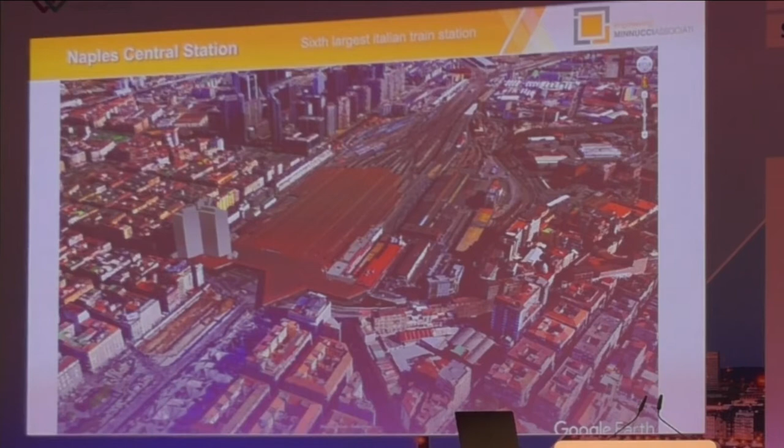So let's go back to the project of Naples Central Station. What you are looking at is just a video that shows you what we have done. So this is the model of Naples Central Station inserted in Google Earth, and as you can see, this is just a dynamic rendering that is extracted directly from the IFC federated models.

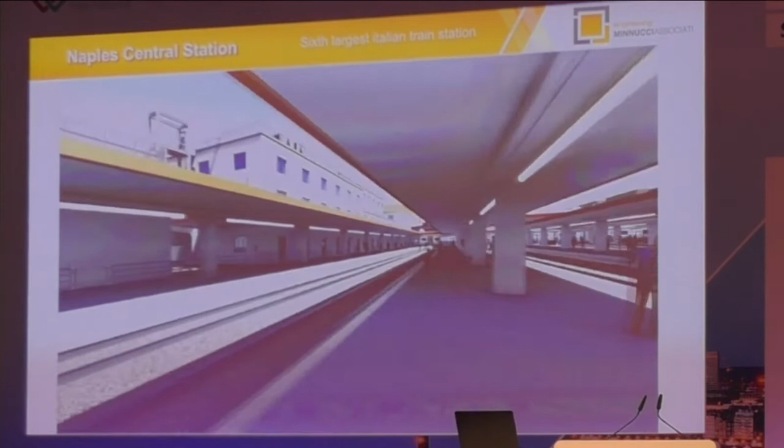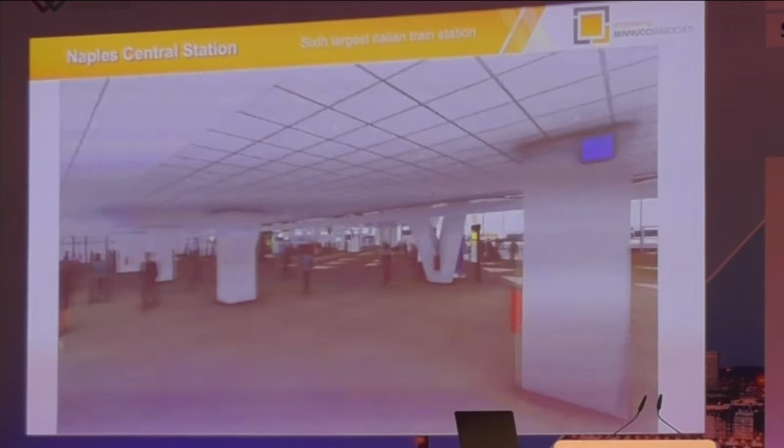So the scope of this video is just to show you how big the project was. The project is composed of 5 buildings and also the infrastructures that reach the buildings. The station is one of the largest stations that we have in Italy, and is the main station in the south of Italy. More than 150,000 people flow through the station daily, and more than 480 trains transit through the station.

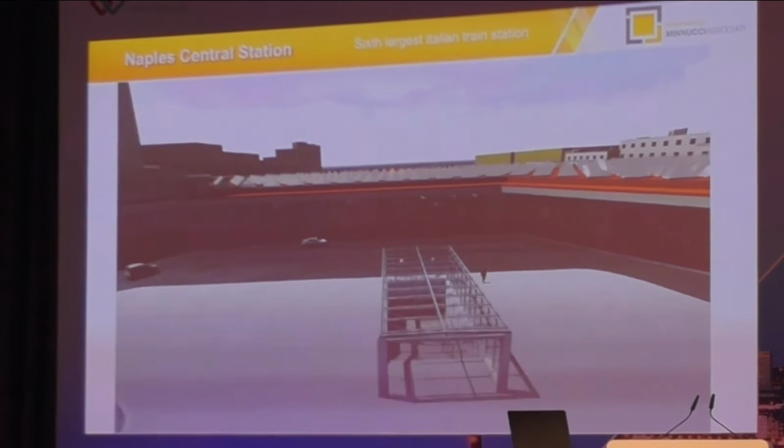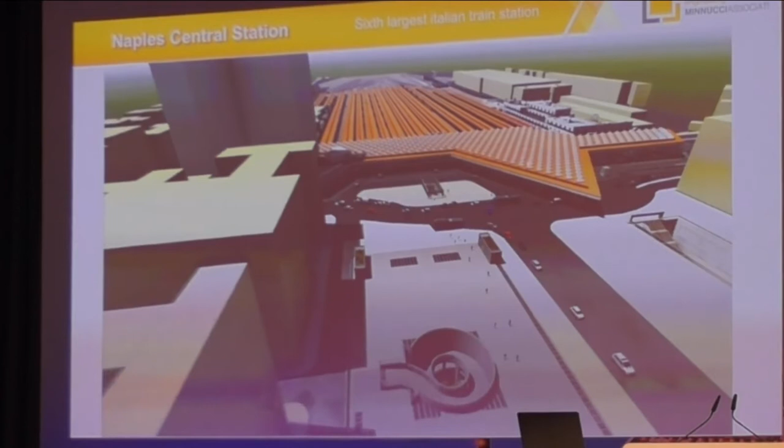So the scope of the project was to apply to the rest of the main Italian train stations the goals that we had. The main goals, the primary goals, were the method for the generation and maintaining up to date the asset information model, not just of this station, like I told you before, but also of the rest of the Italian stations.

You have to consider that RFI has more than 2,600 stations in Italy. And so to better understand the critical issues and solutions for dealing with the CDE and management with it, and then apply it to the facility property, the security and safety, and manage this kind of stuff directly from the CDE.

Then, of course, there are other primary goals and some more secondary goals. One of them was, for example, to better understand how to update the survey, and so how to update the model and how to align the management system and the model.

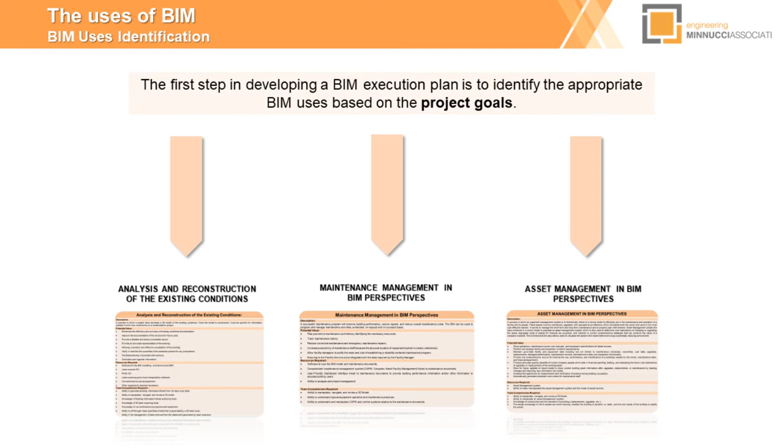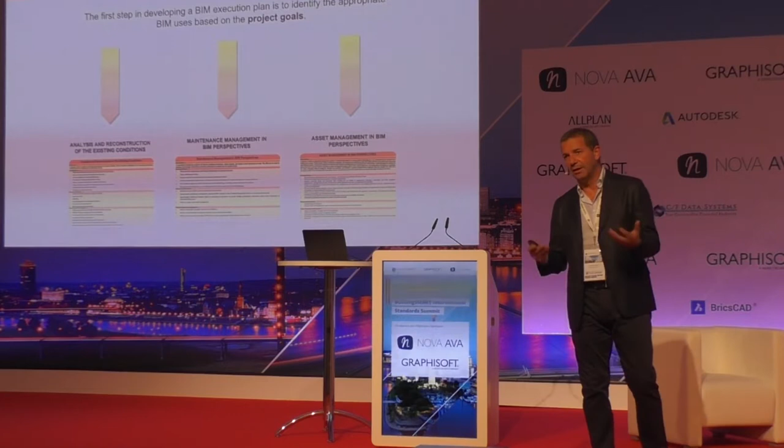So the first thing that we did was to identify the BIM uses. We had the analysis and reconstruction of the existing condition and rebuilding the existing condition virtually. And then we also had to deal with the management system, and also to manage the assets, like I told you before.

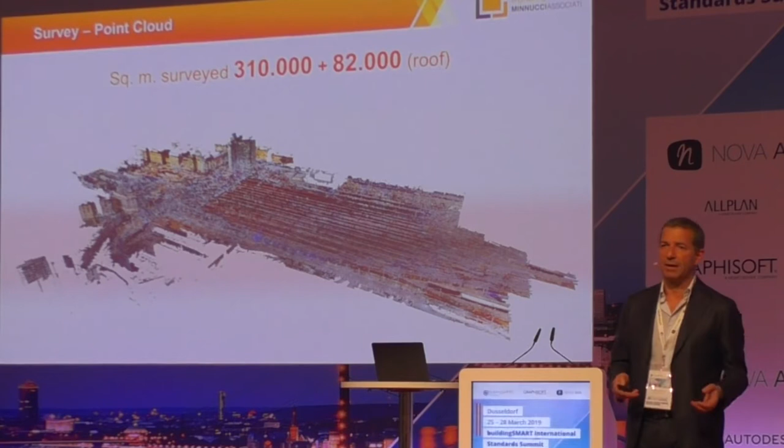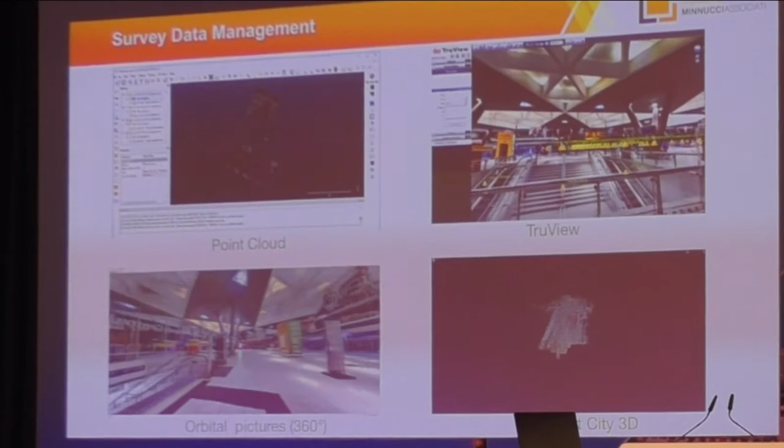So just to better understand, what you are looking at is the main point cloud of the station that we have surveyed. As you can see, the total of the model is really large, something like 40 hectares. So as you can imagine, we had a lot of issues, a lot of trouble and effort during the process. The survey data, we did it by drone and by laser scan.

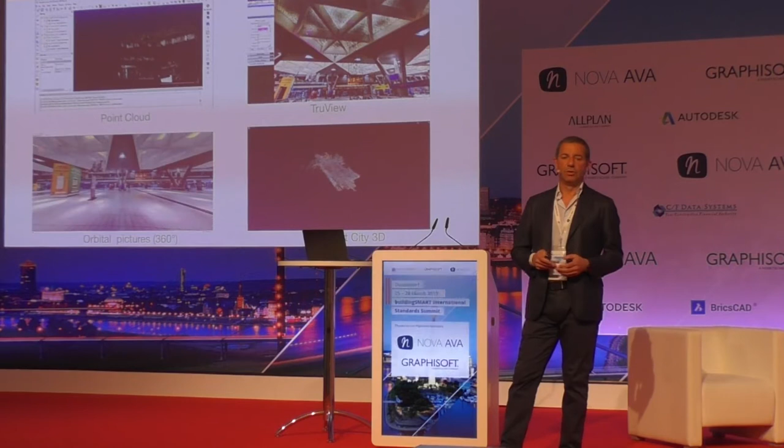We could define a point cloud, and then with the orbital pictures, we were able to have the real situation as it is. So we used software like TruView of Leica, or another Italian software that is Smart City 3D, to work with the point cloud.

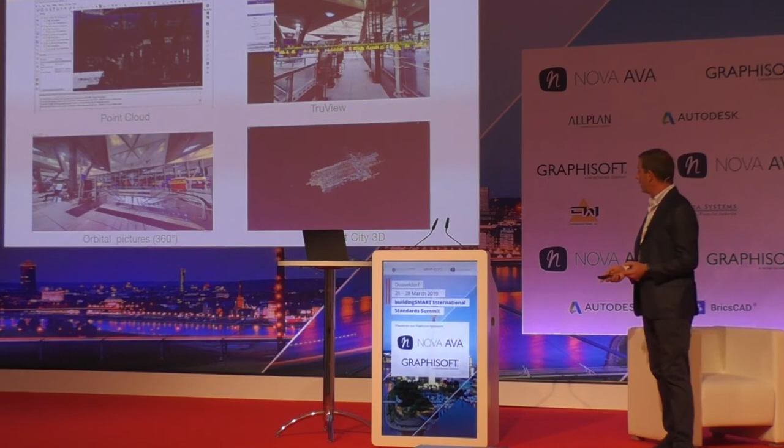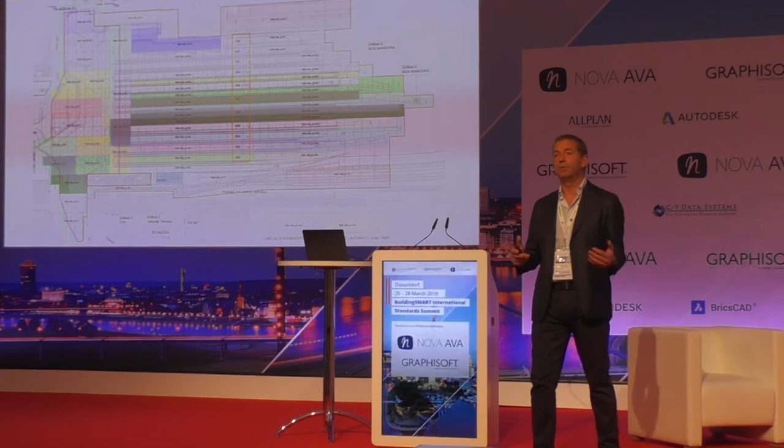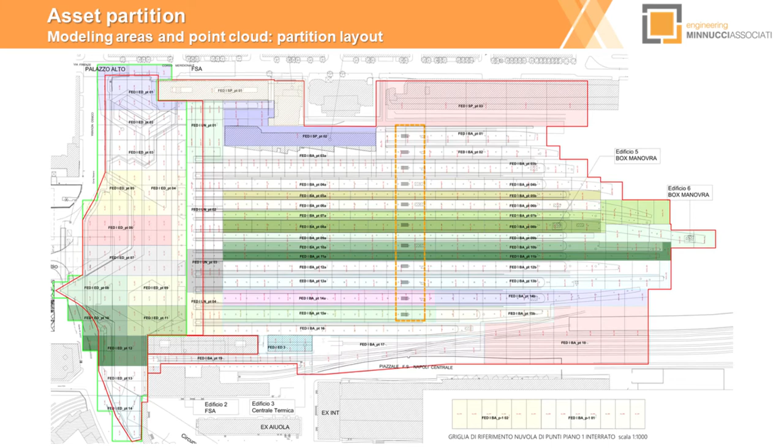Okay, then we had to model the station, but before that we had to deal with the point cloud. Dealing with the point cloud is really complicated when the point cloud is so big, because there is a dispersion of the information. This dispersion of information is shown in this situation.

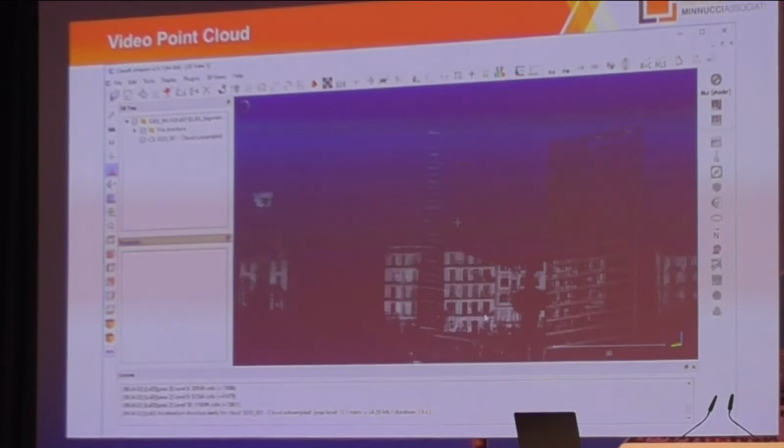So the point cloud is made from consecutive scans, and when you scan something, you have to think that in one scan you can also acquire points that are really far away from where you are. So you have to assemble everything together. The result is an enormous point cloud that is really difficult to deal with.

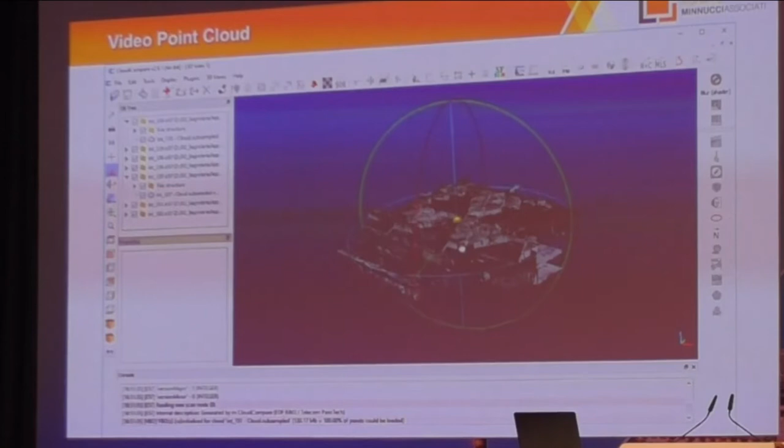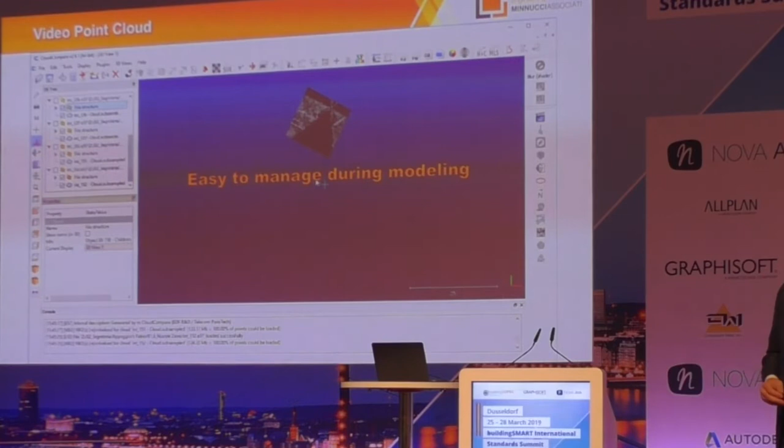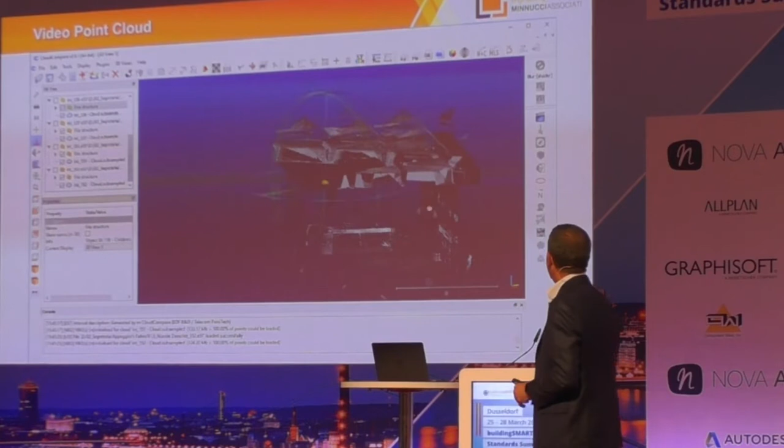So we decided with the client to partition the point cloud with criteria that we defined with them. And so we cut these portions. In the future, we can substitute one portion when something important is changed. Also, these portions are easy to manage during the modeling phase. So I'll go ahead.

The next step was the classification analysis. We studied the asset encoding mode that the client has. The client has really great experience in the field that started 200 years ago. So we had a lot of work to do with them, and then we identified the main IFC classes, and then we defined the hierarchy of the systems.

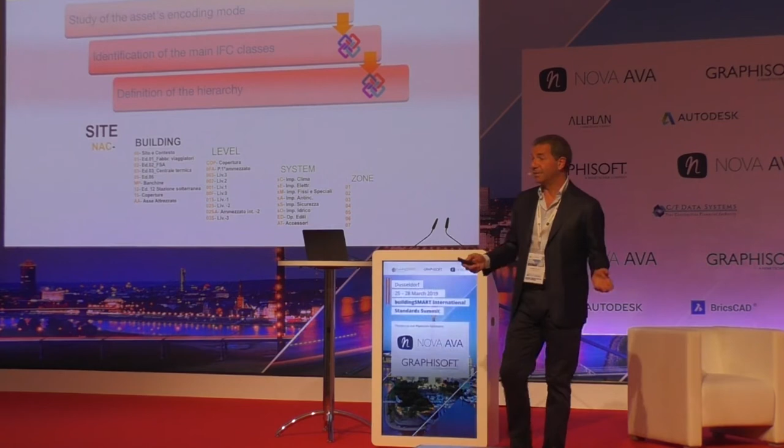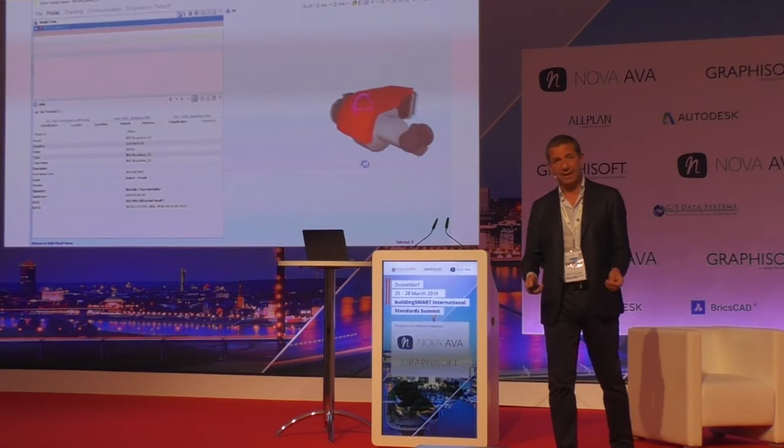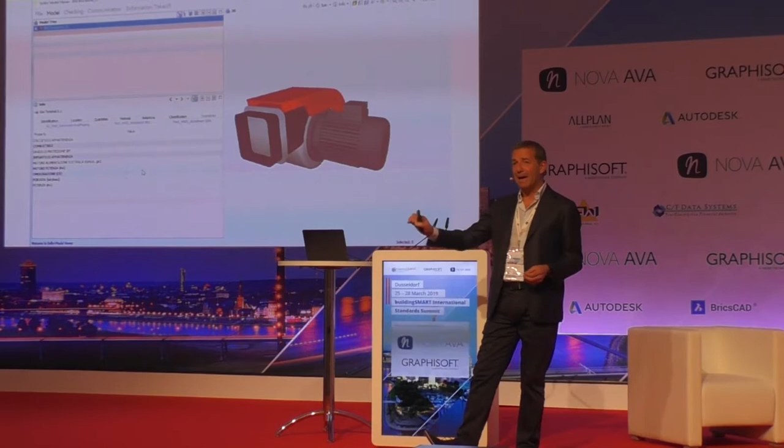The next step was to define the reference data library. Every equipment, every element, we modeled. In the model, we inserted the information, we classified the information in the types of elements, in an IFC way. So every element has its own p-sets of attributes that are necessary for the maintenance during the life cycle of the elements.

These elements are then inserted in the specific position where they are, and I'll show you later how many there were and are. Then we acquired the documentation from the client. As you can imagine, the documentation was largely disorganized because the station has been working for many years.

So we took the data sheets, the survey data that we did, and then the architectural and also the equipment and the MEP as-built layouts. We arranged them in an organized classification, so we could later insert them inside the CDE.

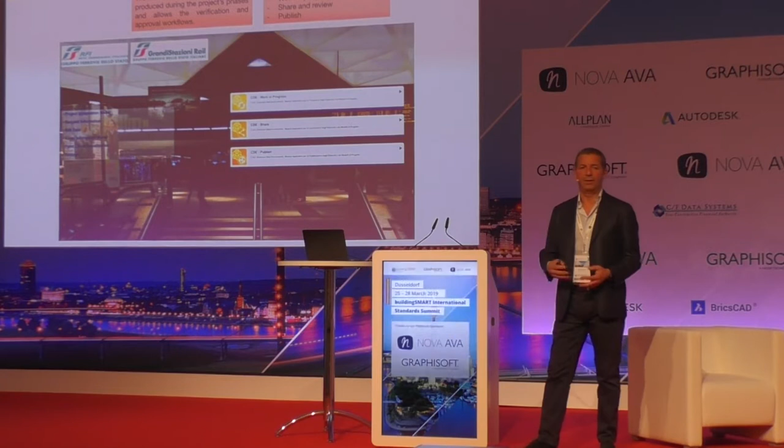So as you know, the typical CDE has a work in progress where the designers, the modelers, shared through a BIM cloud authoring program, more than one, the federated models and the documents, and then we started to work with the client together. They asked us to modify something, and so in the shared area we shared the documentation and the models, and at the end, after the approval phase, we published the model.

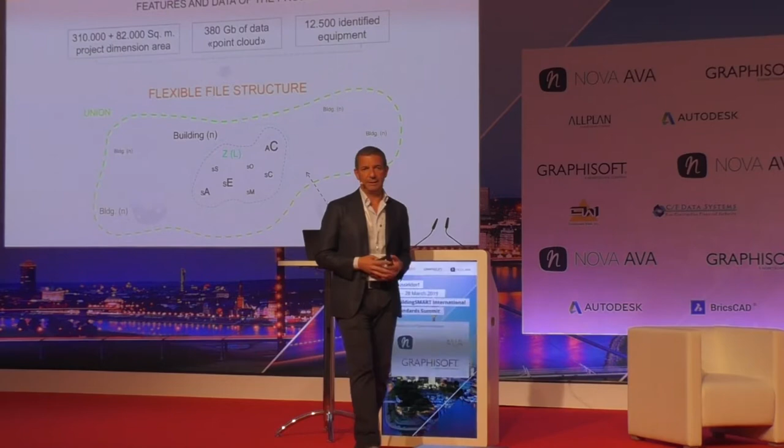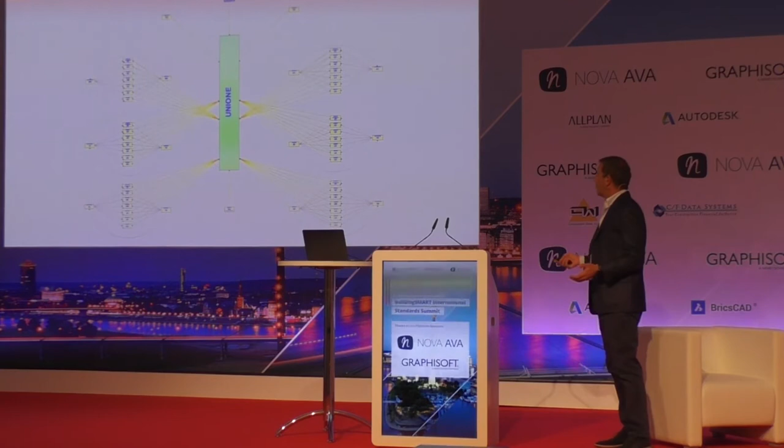So at the end, we had really big federated models, and also the point cloud, and also all the equipment that has to be maintained. There are more than 12,500 that we have identified and inserted in the model. So we did a flexible file structure. The result of this flexible file structure is a lot of federated models for discipline, for areas, for maintenance systems, and the union of them is the model that you have seen at the beginning.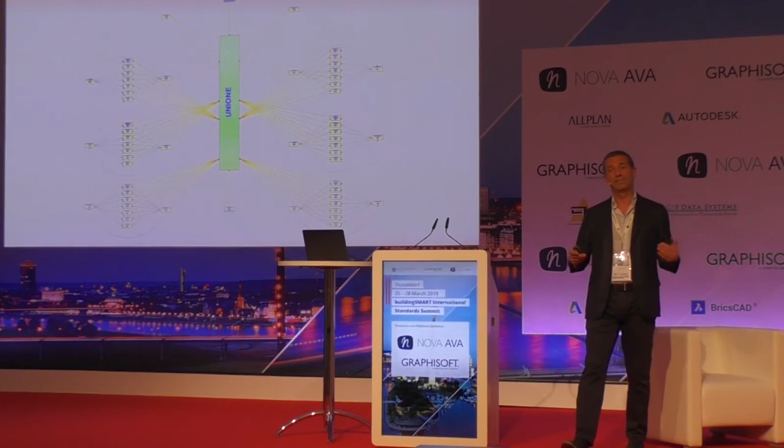The result was 44 structural models for the implementation of the BIM uses that we defined. And, okay, there is something that is jumped, but we did everything with Open BIM. I don't know why Open isn't shown there. But we did it with Open BIM.

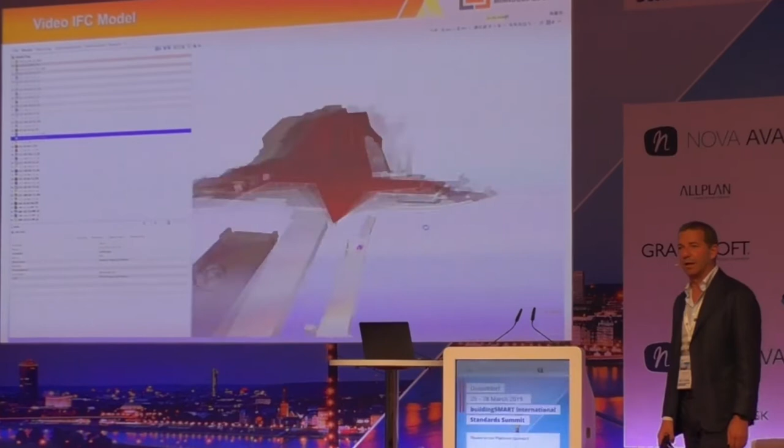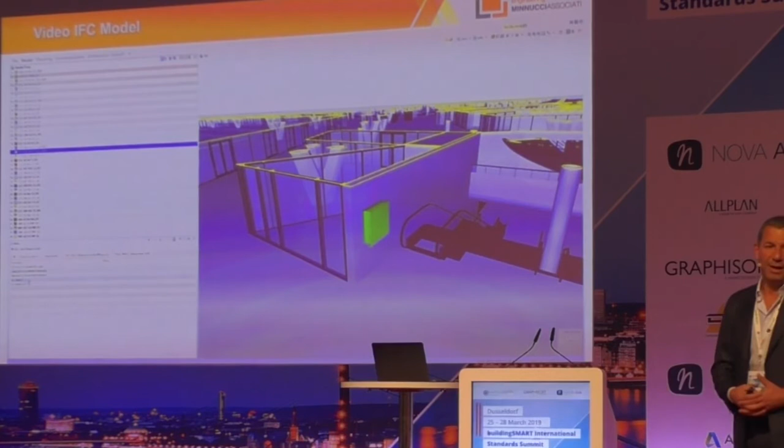This is the result. What you are looking at is the model inside Solibri. So this is the federated model of all the models, as you can see, in IFC. You can do whatever you want. You can query the model. You can look at something. You can look at every equipment that has to be maintained, and also at other properties of the model.

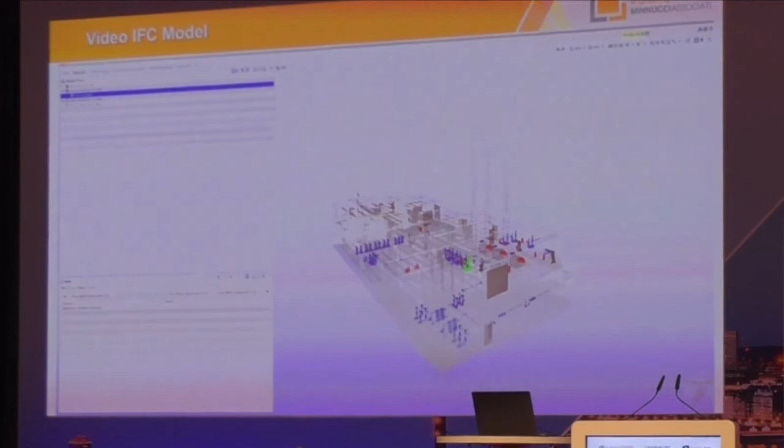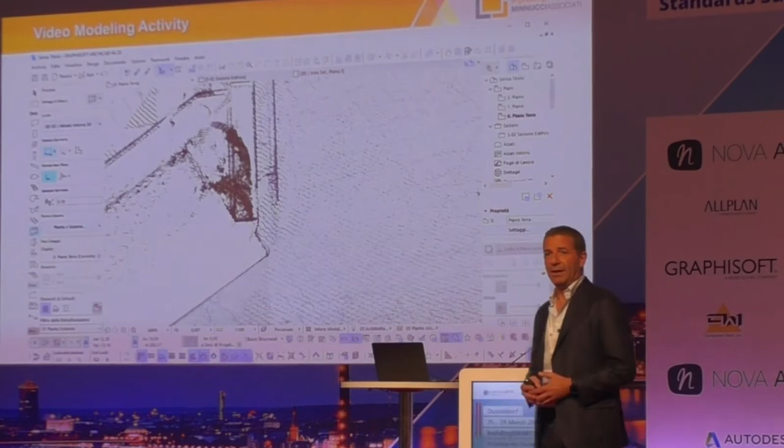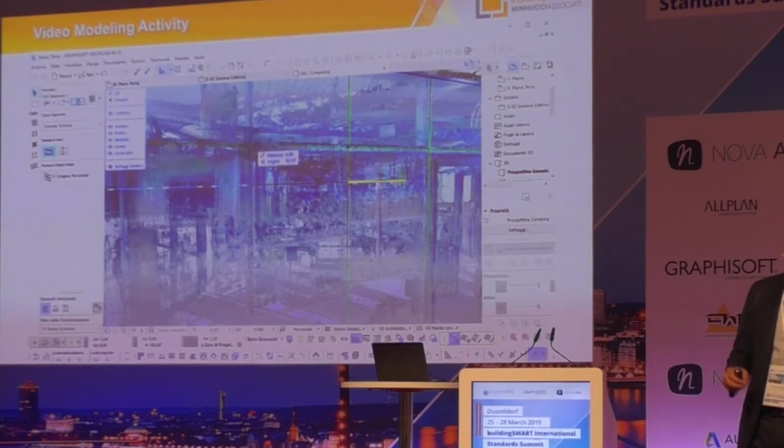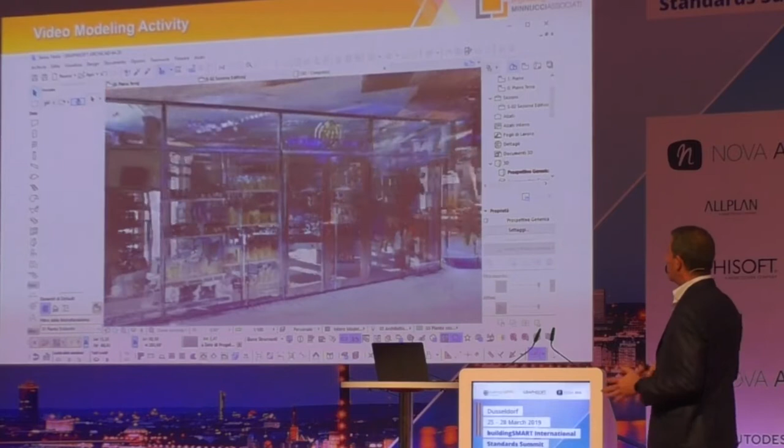Okay. Just to make you understand how hard the activity of modeling is. This is a portion of point cloud that a modeler is using to model a curtain wall, for example. In this case, as you can see, the modeler is able to insert the curtain wall in the right position, and every frame of the curtain wall can be put in the right position and is overlaid to the point cloud, so we can be sure about what we are modeling. So the as-is of what we surveyed and what we model is absolutely certain.

So the equipment. Then we inserted all the equipment, like I told you, the equipment that has to be maintained. And this is just a view of an example of them. Okay.

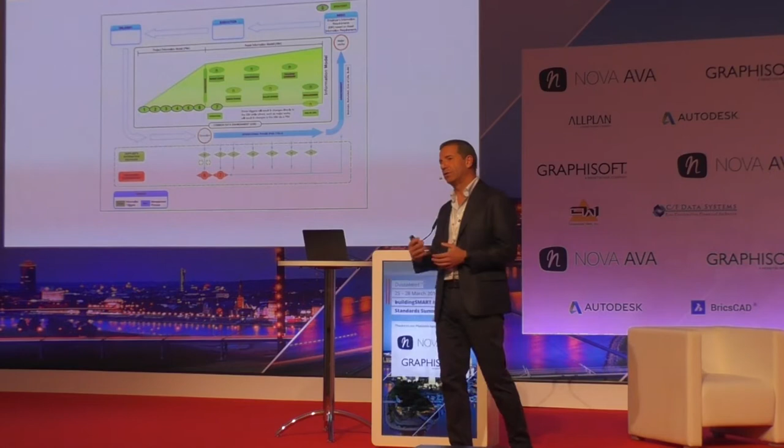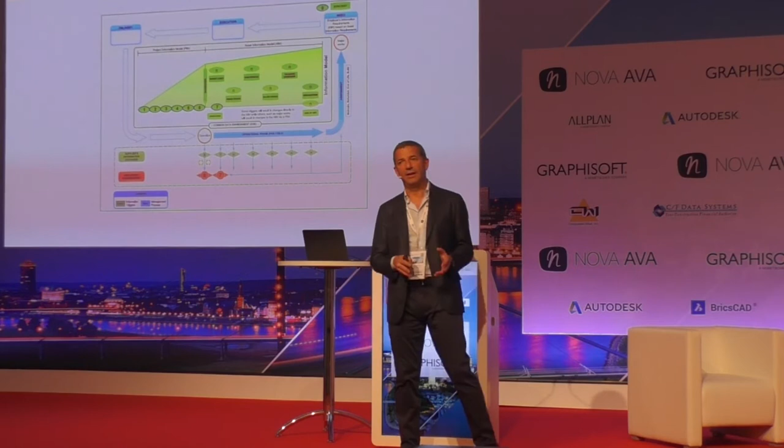Everything has to be aligned. For accounting, normally in a larger situation, everybody uses the SAP system. So it's really important in this phase to define which system is the master of a piece of information, and which one is just the slave, which system is writing the information, and which one is reading the information, because the information has to be unique. So we can have, in this situation, major works, maintenance or minor works, or something else that will change the asset. So if something physically changes, the master has to be the model.

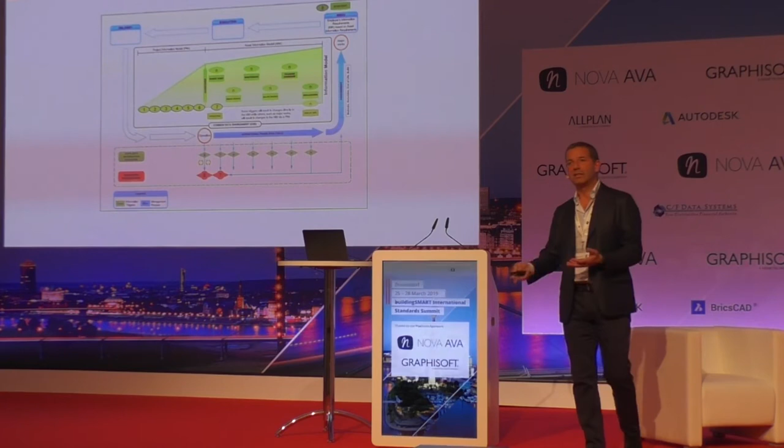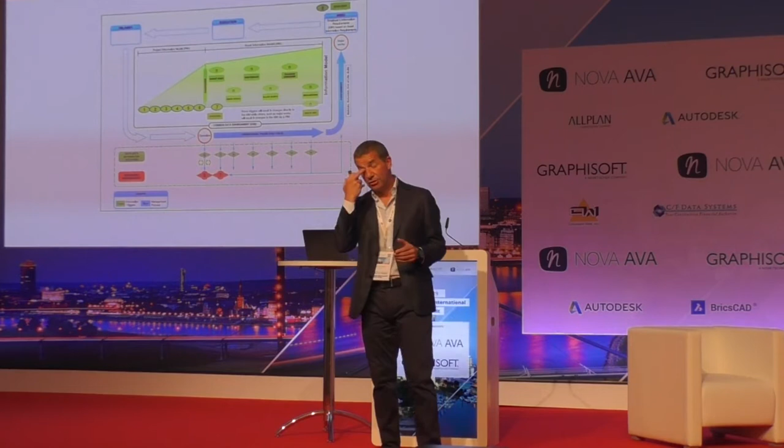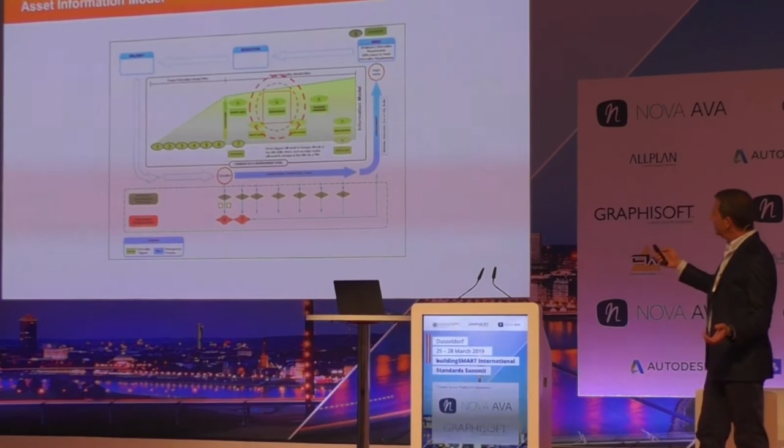When you modify something that needs a major work, you start a new project and you remodel everything, and then you have to substitute that portion of model that is changed, and also the portion of survey that is changed. But when you do maintenance, maybe something small is changed, and you have to update the model. That's the problem. So we are in this situation, and we can have many maintenance processes during the life cycle of the asset that can change the asset.

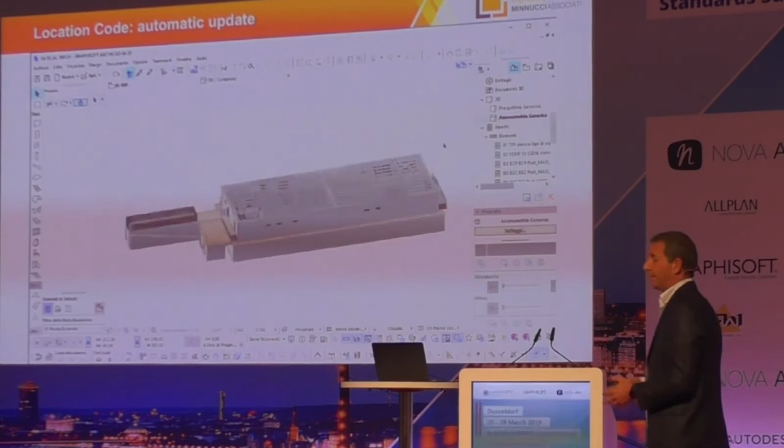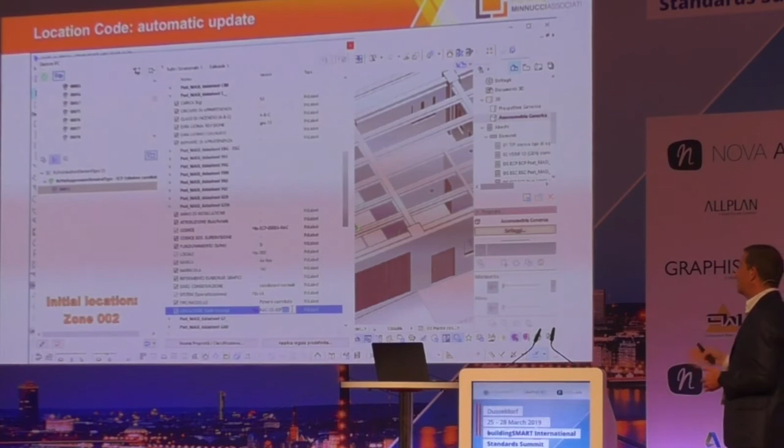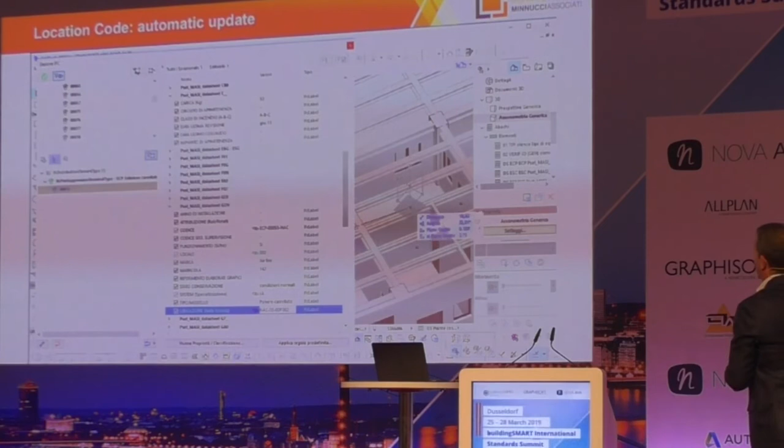What we did was this. For example, we set the authoring program in a certain way that we are able to extract directly, automatically, some information from the model, like the location code that is the position of the element in a specific way. As you can see, we are in the 3D of the authoring program, and this element, an extinguisher, that could be inside a specific area, can be moved to another area. So it has to change its own location code.

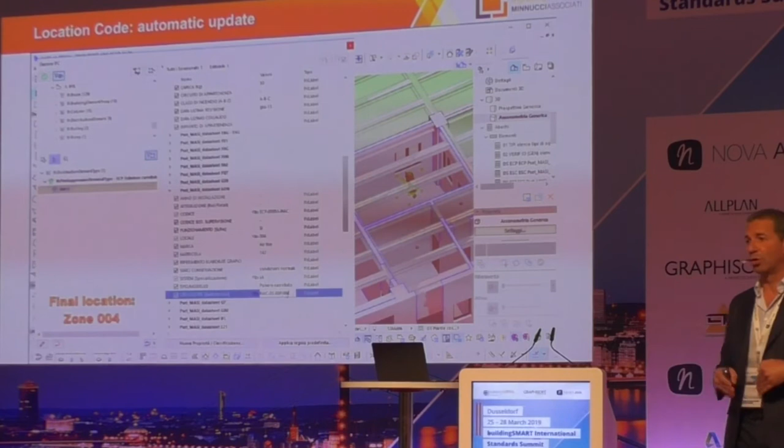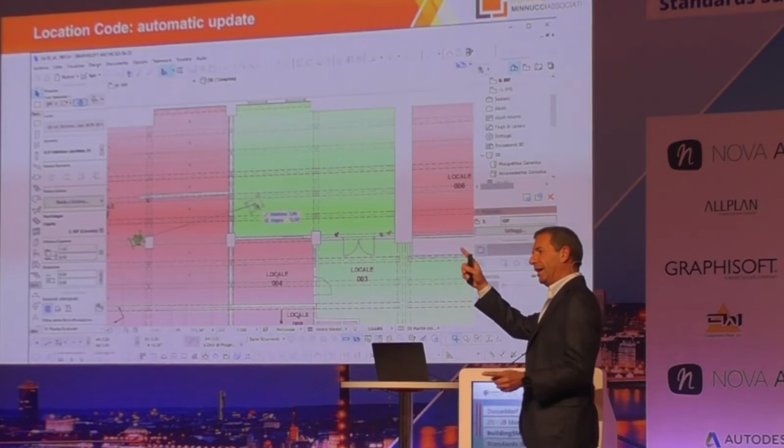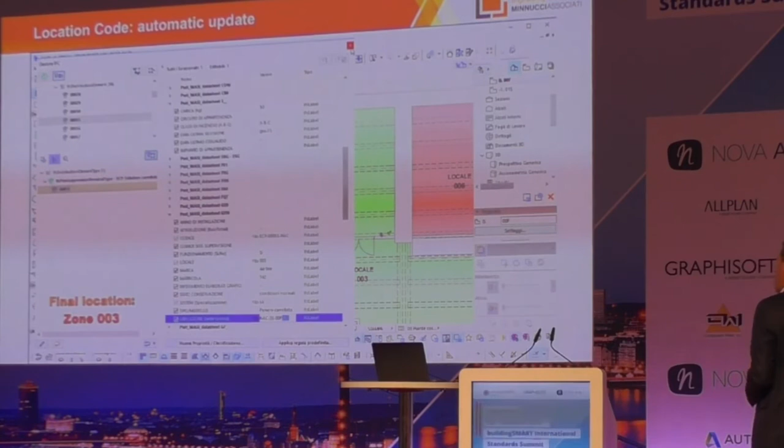So as you can see, the authoring model, in 2D and in 3D, changes the location code automatically. So this means that if in SAP there is another position, they have to be reconciled. So this process is strongly important, because we can virtuously realign all the systems.

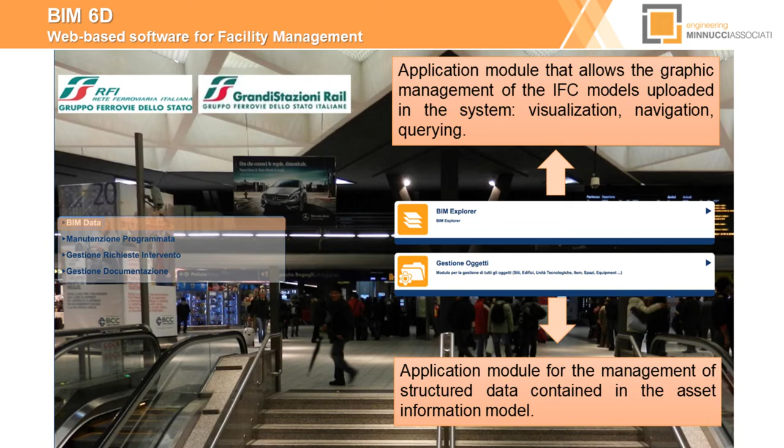So now we are in the 6D, in the facility management. We have to deal with our asset, and we have to maintain the system up to date, as I told you. But also we have to be able to query it, to visualize it, to apply a model management.

So as you can see, there is a part in this. We modified the CDE, so the CDE is able to show the element, but also to bear the maintenance. So in this case we have a process that is the programmed maintenance, the scheduled maintenance.

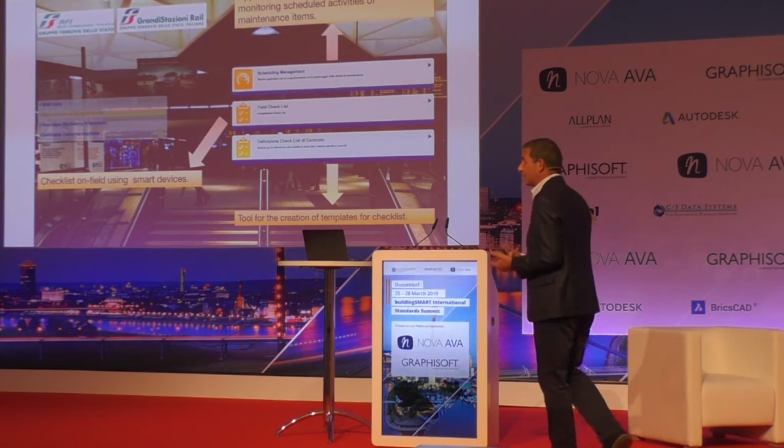So in the scheduled maintenance, you have a checklist that you have to fill on field, or the owner, the client, can create his own checklist and ask the facility service to fill it. Also, we have some job requests, and in this case we have to control the maintenance activities.

Also, we have to deal with the technical documentation of every equipment, which has to be kept up to date with the new situation. Okay.

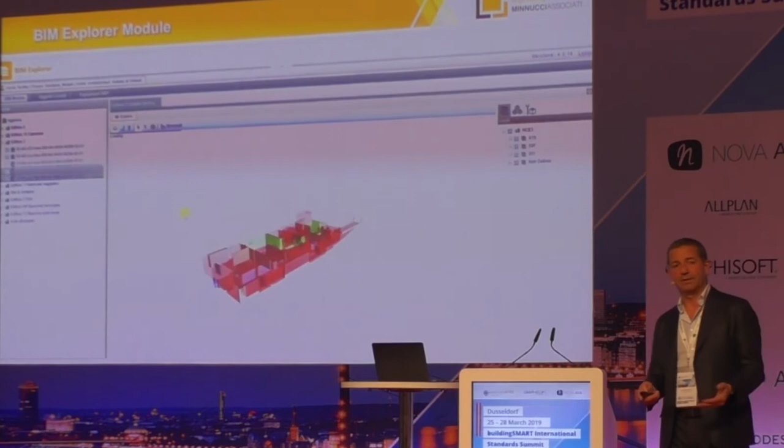So in this video, you can see the BIM Explorer, which is able, directly inside the CDE, to show the IFC property of one element, or also the SAP property of the element, because they are joined. And these are the SAP properties, and you can filter everything. So you can find an element, or an equipment, or whatever you want, by filtering the property in the inquiry. The SAP property or the IFC property of the element, or whatever you want.

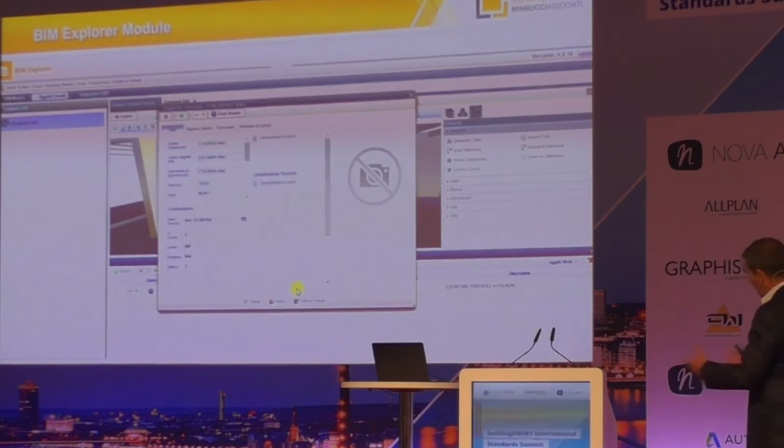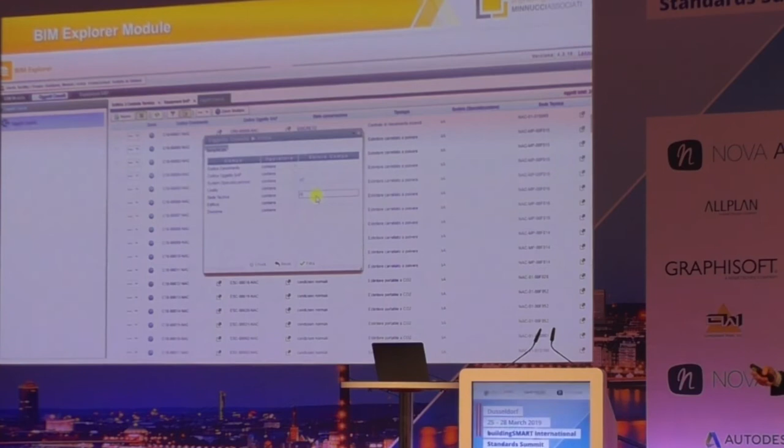Also the location code, or the area, or whatever you want. Okay, and of course you can also look at the scheduling jobs, export it in Excel, and filter in every way you need.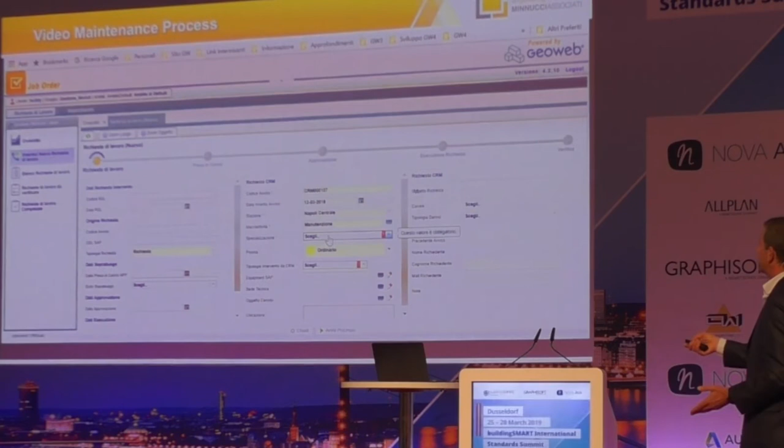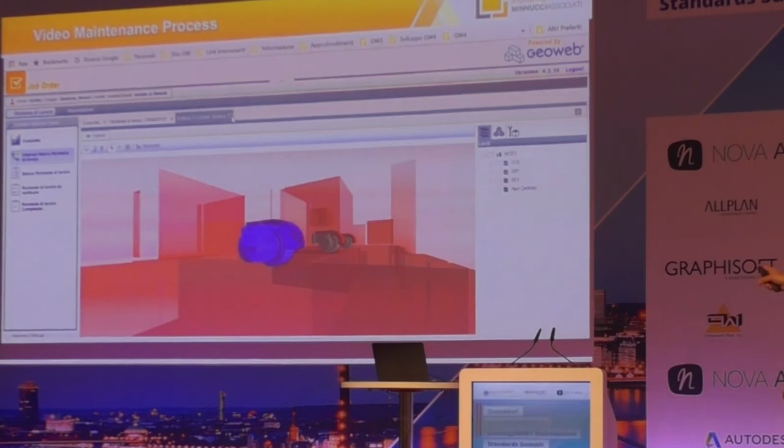Next step is the job request. The job request has a procedure that has to be followed. So at the beginning, there is the job request that you see there, and then you can insert the request of job. The request of job can be identified directly in the model, but can also be associated with the specific equipment that has to be maintained. So as you have seen before, you can look directly at the element with the unique code that it has.

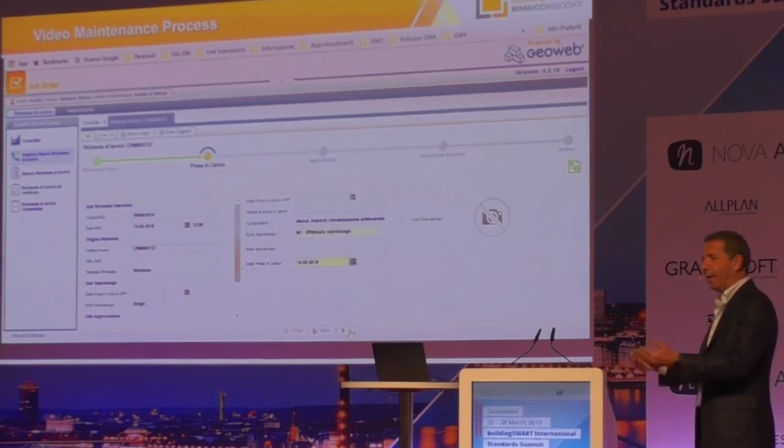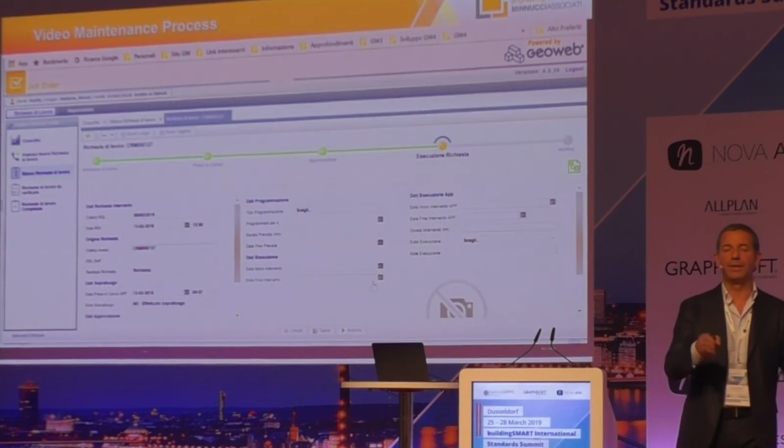And then there are many other steps that depend on the kind of maintenance. The maintenance could be done directly or could have an approval phase. If it has an approval phase, it has to be approved. And after it is approved, the maintenance service will program, schedule the activity. And when it schedules the activity, we follow another procedure to execute the activity.

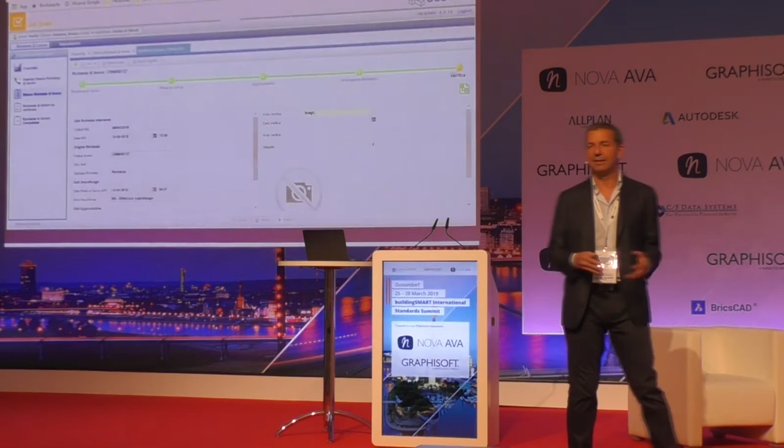So this is programmed, and on site, by using an app on a smartphone or a tablet, it can start the maintenance operation, and the controller can check that he or she is maintaining. He can scan the element directly on site. The controller can see that he or she is doing that work at that moment, and then at the same time or later can directly approve the intervention that was done, put the date of approval, and insert the documentation directly in the model.

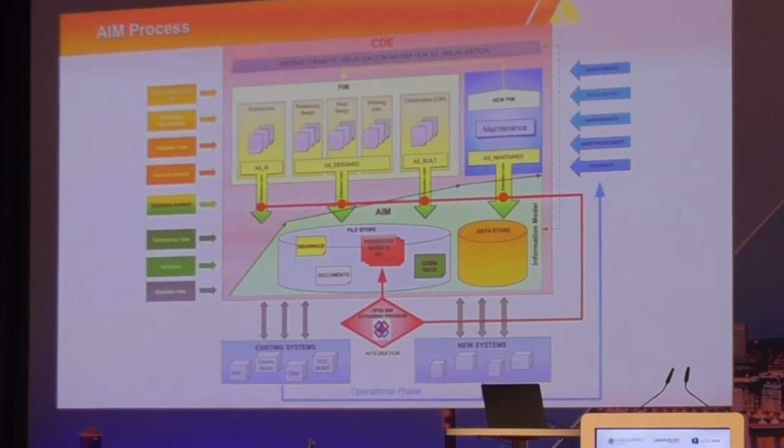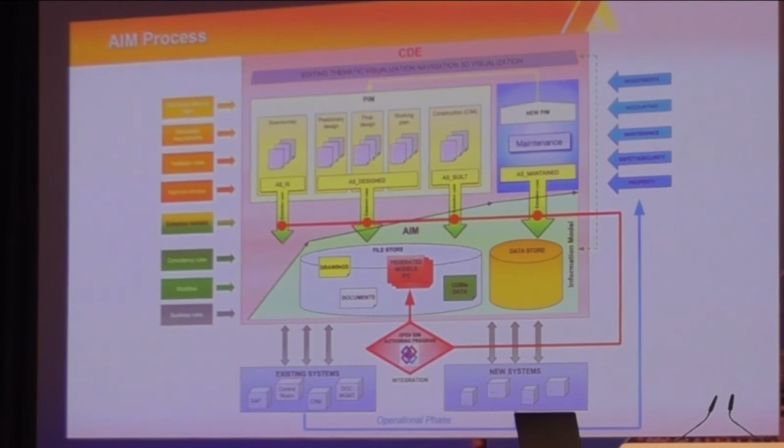What is really important here is what we have learned with all this work together. As you can see here, there is a CDE. All of this is the CDE, and this is the asset information model. The level of information grows constantly during the life cycle of the building. The life cycle of the building starts here.

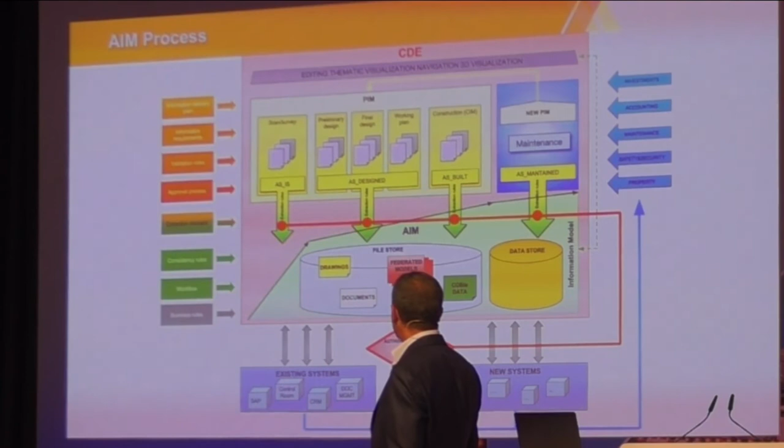So when we survey, scan something, we have to insert inside the asset information model the information that we want. We have a survey phase every time. Even when we just have a land, we have a survey phase. And we have to insert the data in the asset information model. The data has to be inserted by using an authoring program that inserts inside the asset information model the federated models of the element that we want, of the model that we want, with the IFC property.

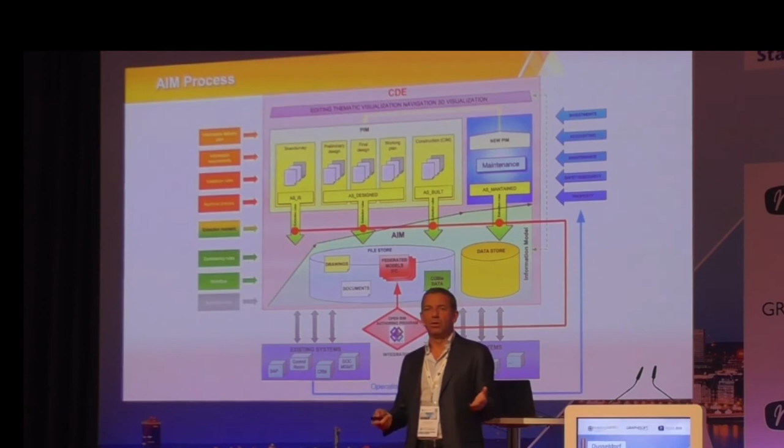Here there are extraction rules. Extraction rules are really important because if you think about the PIM, the project information model, during the design phase or during the construction phase, the construction information model being a phase of the project information model, we have a lot of information that we probably don't need to conserve in such detail to maintain the asset. I probably don't need the specific information of some phase, but I need it just to apply some business intelligence analysis. And the same is true for the as-built.

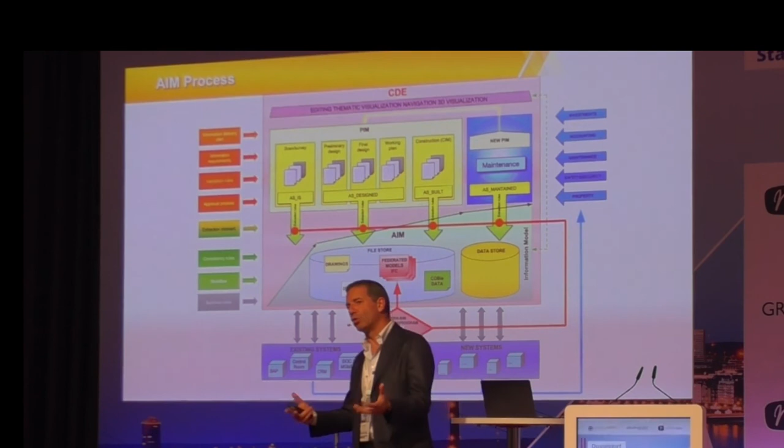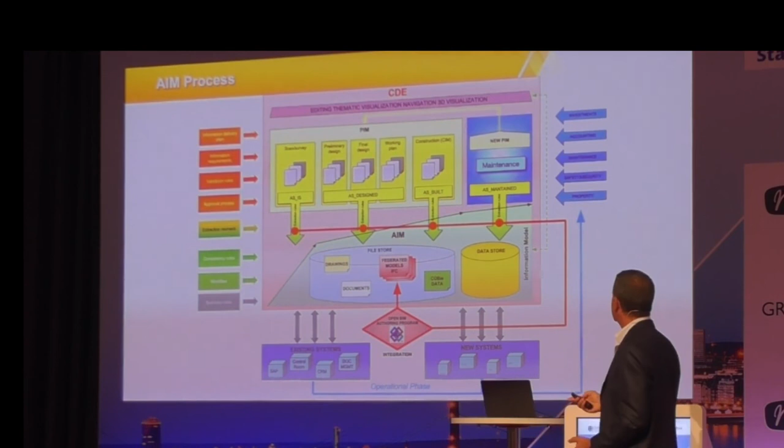So with the extraction rules, you define what you have to insert in the asset information model and the way the information is related. Then, when in the maintenance phase, this phase, a situation starts that leads to a major work that will change, for example, the building, you have to start a new project information model. If you do a small maintenance, on a small element, you have to be able to change the model directly through the IFC. So what we discovered was that the IFC model is the heart of the entire system.